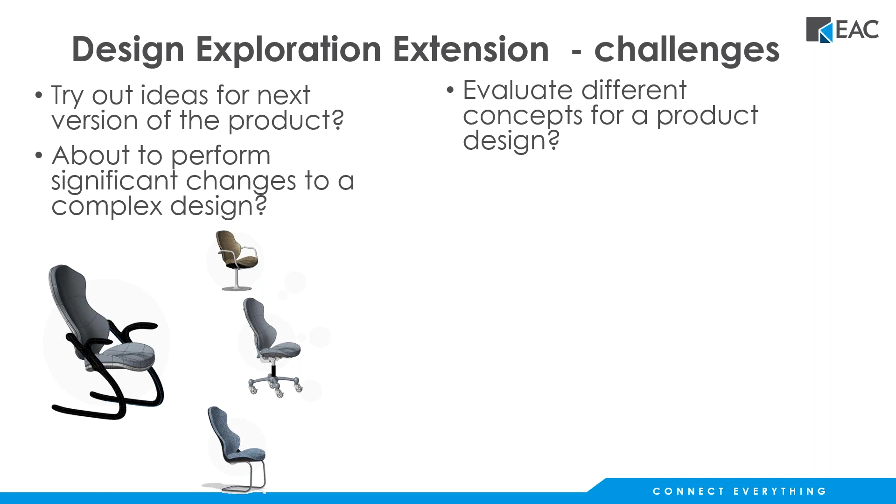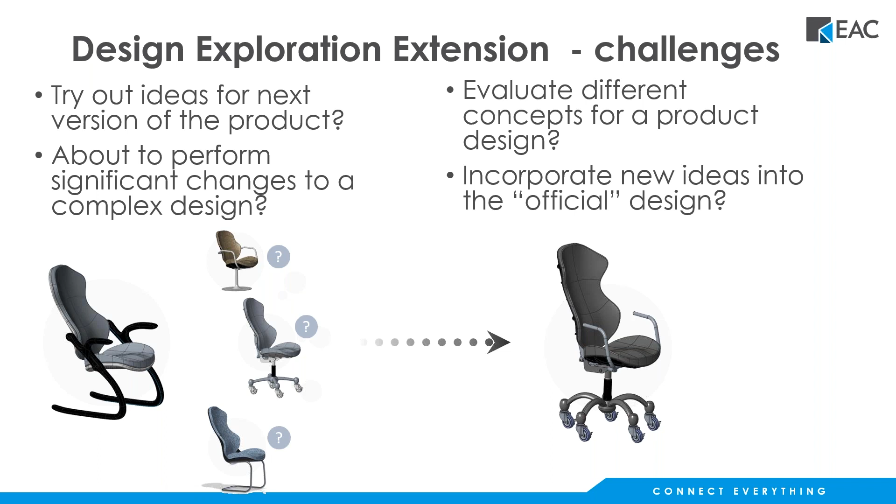You might start off with some of the same features and the same geometry and whatnot, but how do you sort of manage that and iterate and roll forward and take some of the initial thoughts and models into different variations of that? And then how do you actually evaluate those things? And then once you finally roll forward and say, yeah, this is the ultimate design that we want to try and produce, how do you consolidate those different thought processes, those different schemes into the final design?

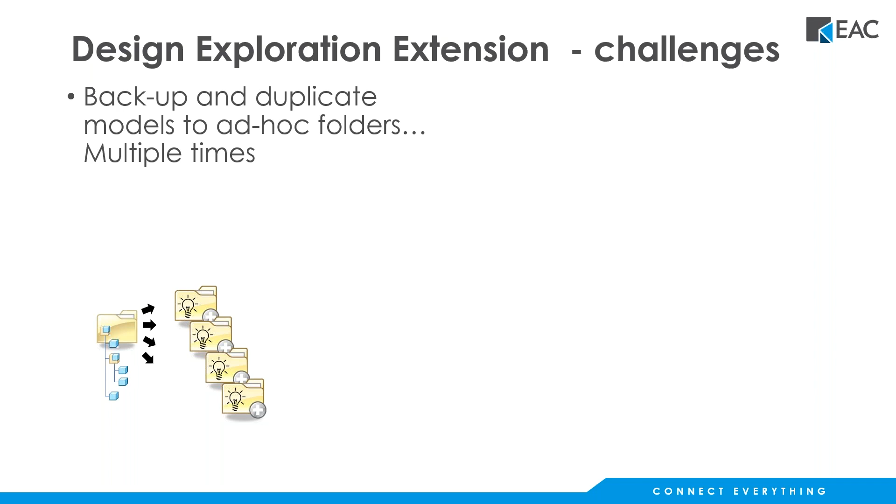Well, a lot of what we've done in the past is what's shown here. We do backup and save a copy, and write that to a new folder, and we have all these different versions of the design. Then we're bouncing back and forth between these different folders, trying to keep track of what we did when, what idea we liked, what worked and what didn't. Whether you're in Windchill or using an old style data management file folder structure, you're bouncing between folders, opening and closing, cleaning things out of session, and pointing to a new folder. And that's if you can remember where everything actually is.

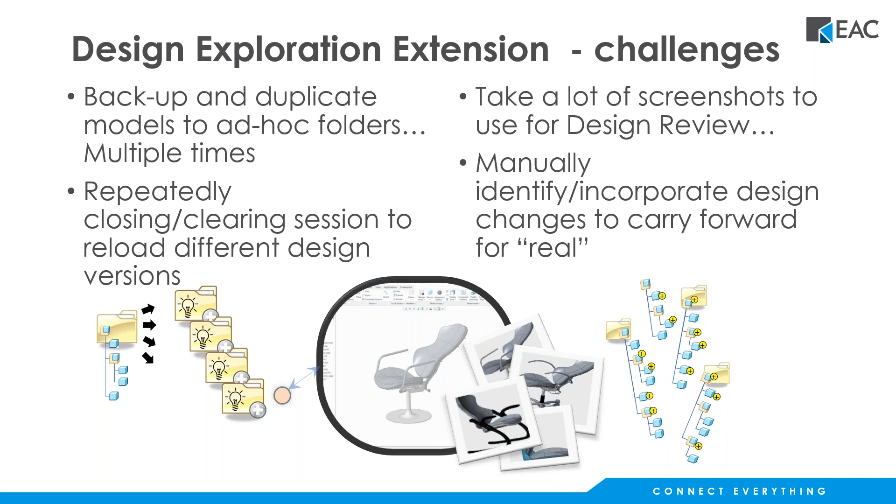So how do you do design reviews of this? You've got lots of different screenshots, or maybe you're in a conference room doing a design review. How do you manage that? How do you work with those different options? And then how do you bring all that forward? You've got all this extra baggage you have to manage and keep track of. If you ever want to go back in time, that's great if you're working on that project right now and can remember what's going on. But if you're like me, I forget what I've done six months ago, or even a couple weeks ago, which folder I wanted, which model I was working on. It gets rather cumbersome to keep track of all these different concepts, versions, and flavors of the model.

Well, that's where design exploration comes in. What you're doing is creating what are called checkpoints in the model, and you can have all of these different iterations, design concepts, and thought processes all stored in one location. That can be done at the part or assembly level, worked interactively or in an integrated fashion, so you have different design variations all in one place.

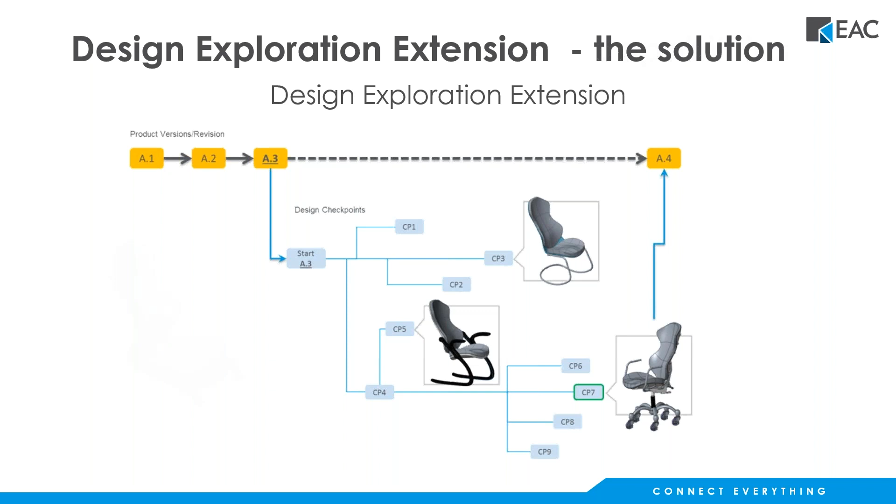Here you can see a layout or roadmap of how that works from an architectural standpoint. We're going to have different product revisions, and say, hey, we're at A.3, we're going to start a new branch with some new design options. The A.3 is probably familiar terminology, but the CP is a checkpoint — a snapshot of that design at that point in time. Then we can step forward and back, toggle between these different checkpoints, and roll forward different options, keeping it all organized in one location. So here's a roadmap of what this does.

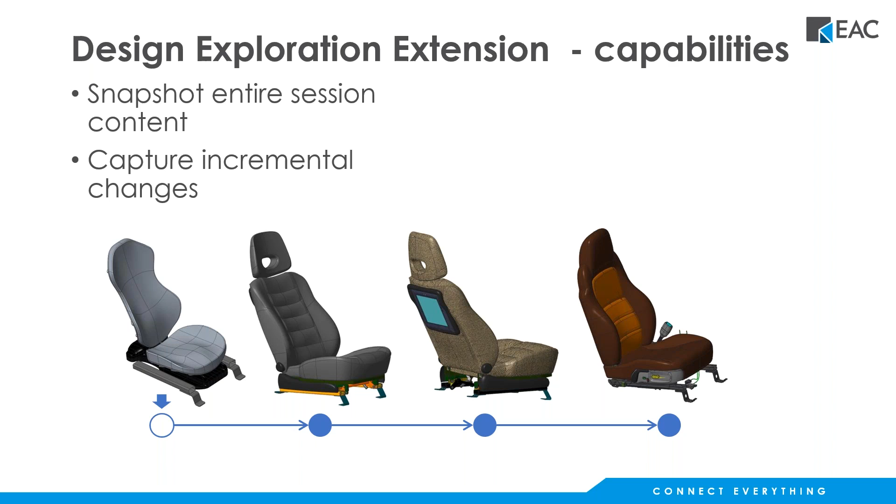I'm just going to build out the slide here and we'll talk about things. So what we do is start the design exploration session, and I'll show you what this looks like both in slides and in the software shortly. We're going to snapshot the entire session content, and then work with incremental changes, either at the part or assembly level, to roll through our design concepts, try out different things, and snap back and forth instantly between these different checkpoints.

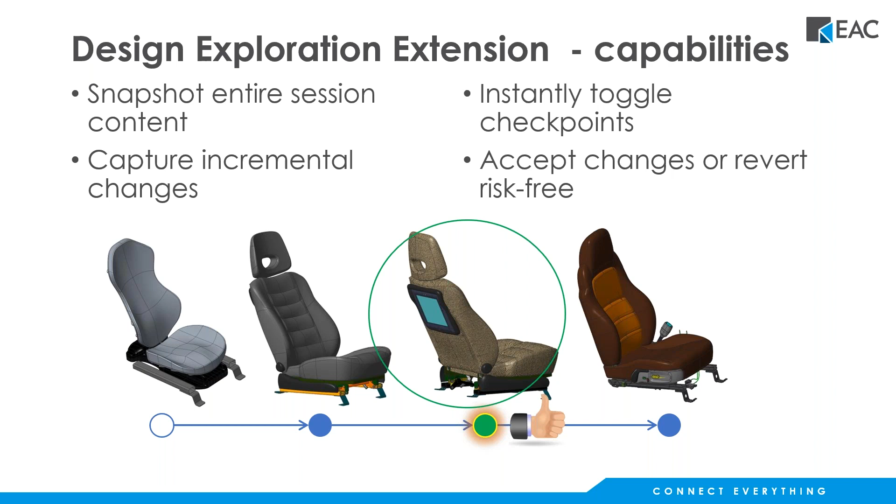So it's not like we have to worry about clearing our objects out of session in Creo, going to a new working directory, and opening up a new assembly or model from there. We can toggle back into the final design we want to keep, and choose whether we want to accept those changes or roll back to a different checkpoint at any time, since it's pretty risk-free and straightforward to do. We'll build out this slide too — we've got different capabilities, we can split off into different branches and try different things.

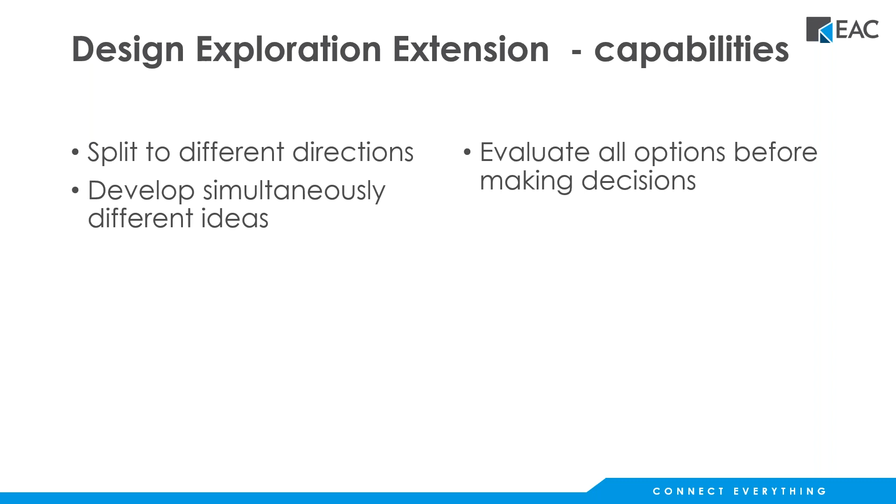You can work on different options simultaneously. Here we'll build out the graphics to show this. We start off with one initial base model or concept, and we can branch off in a lot of different directions, starting from that original design and taking it further. We can toggle back and forth between those different options at any point without losing any prior work, because it's all contained within that assembly.

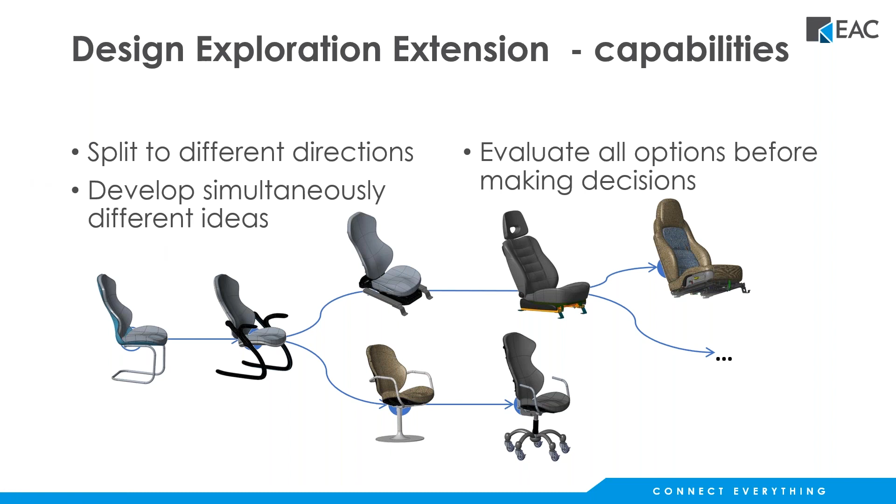So what does this look like in session? If you haven't seen this before, take a look at the Manage Session menu—we'll show you this live in a minute or two. You'll find the option for Design Exploration Session, and you can either start a brand new one or open one up and begin working from a previously created design session.

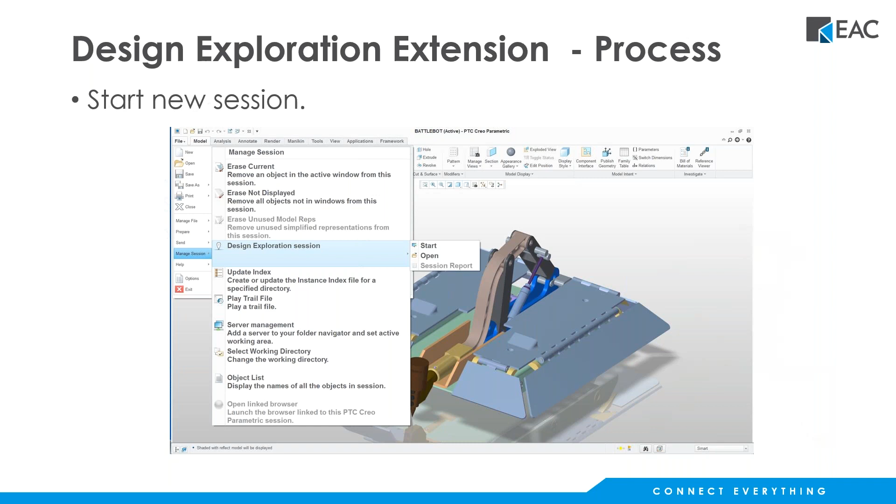So let's go ahead and take a look at that. Here's what it looks like. You'll note that when we open up that session, it opens up what looks like a model tree, parallel to that, but this is all your checkpoints. You've got tools for toggling back and forth between different checkpoints and creating branches and new checkpoints. You can think of this as very much like a snapshot of the process.

So I want to start a new branch of a design or make some changes, and I can go off in a different direction and try different concepts. When you start this new session, it gives you a couple of different checkpoints: the pre-modified checkpoint, which is basically where you start from, and an entry checkpoint. This gives you the opportunity to change that and update the different checkpoints from there. Notice at the bottom, you've got an add checkpoint option right here—so as you make modifications, add or remove features, you can add the checkpoint to capture those changes.

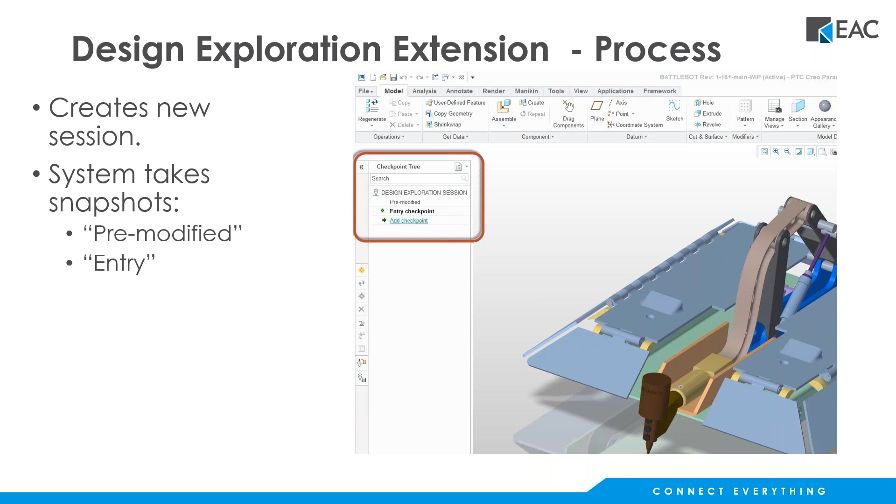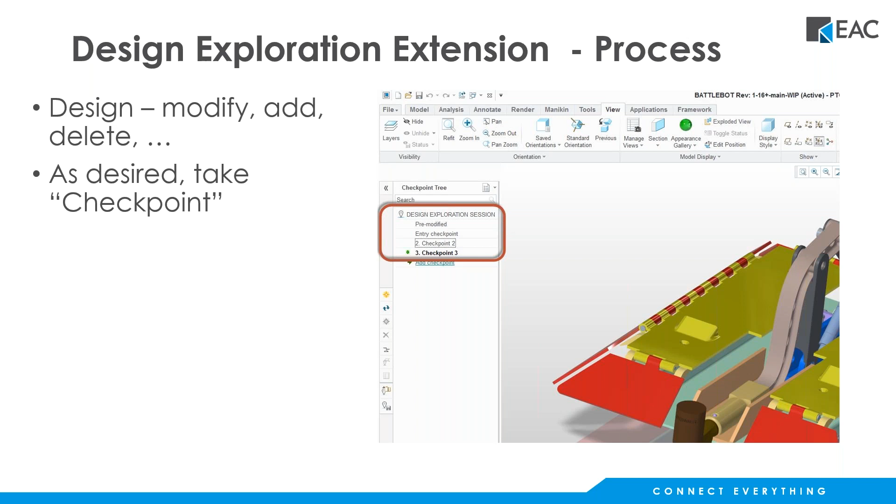And that's exactly what we're showing here in this slide. Go ahead and do your design changes—it doesn't really change how you work inside Creo. It just gives you an opportunity to manage the little snapshots or checkpoints along the way. You'll create features, add parts, pattern things—your normal day-to-day operation of working with Creo—except now you've got this additional capability of creating checkpoints to track your thought process through the design and development.

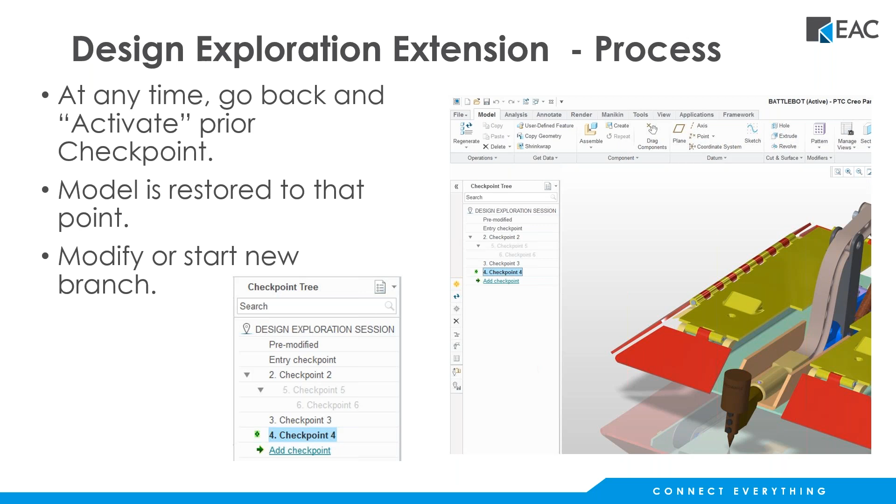If you'd like to go back in time and take a look at a previous checkpoint, no problem—you just select the checkpoint and activate it. It'll snap back to the previous set of configurations, features, and components to take you back to where you were at that point in time. You can roll back and forth between these different checkpoints at will. So it's really straightforward to look at these different design variations.

When you've completed the modifications you want and you want to land on that final option, you can save that design exploration session. There are icons in this little tray in the interface for that. Go ahead and save that session, and that saves it off as a TMU file—just a different file type, and we'll show what that looks like to open up from Creo. It saves all the different checkpoints and everything along the way.

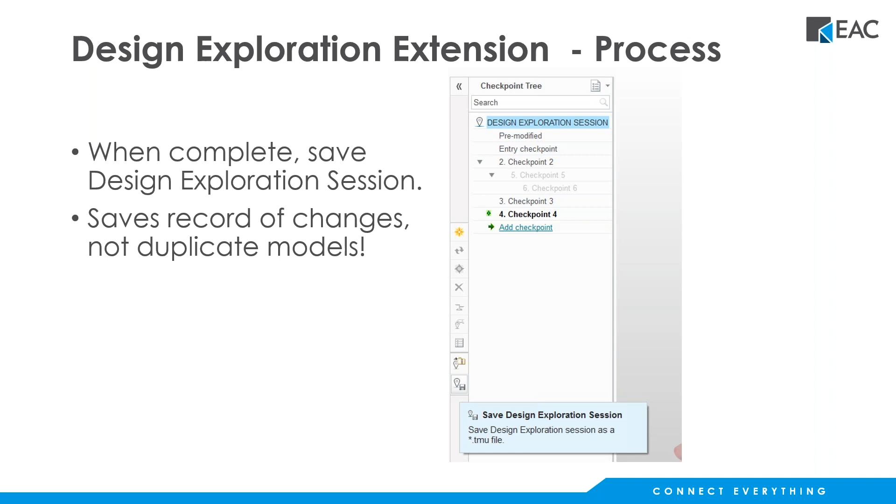So it keeps track of all the different changes. And this is the beautiful part of this: I don't have to write this out into a different folder—all of those changes and modifications are stored inside that part or assembly file. So the next time I want to open that up, I can see all of those different changes and say, let's go back and look at checkpoint number 4 and start from that and do some modifications to it.

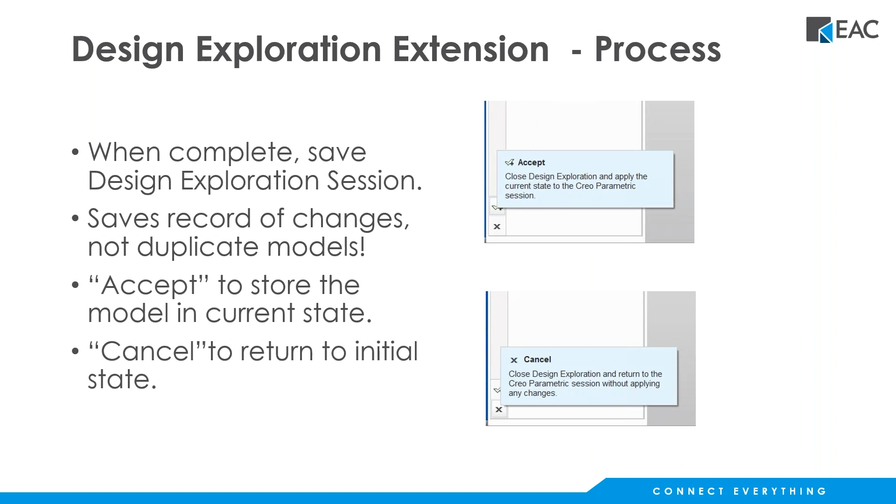If you'd like to, go ahead and cancel that. If you want to abandon those changes, no problem. You can cancel out of that just as easily as saving it. So it's really very easy to work with.

It's very straightforward. So here's the process of opening up a previously created design session. You just go back and open up that TMU file, and it'll show you that tree from there.

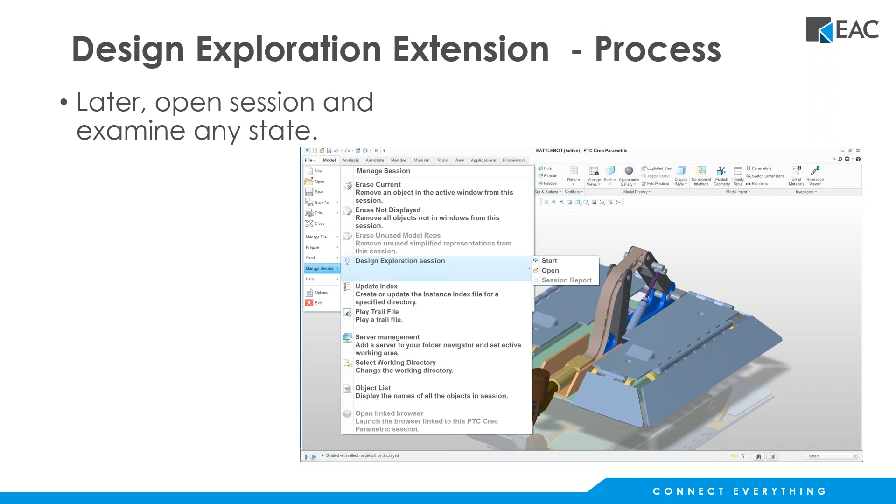The thought process behind this facilitates creativity, because you're allowing much more flexibility with respect to creating the different options, storing them all in one place, and you don't have to worry so much about file management and folders and organizational things. You're just focusing on the design process instead of being a librarian or some sort of data manager.

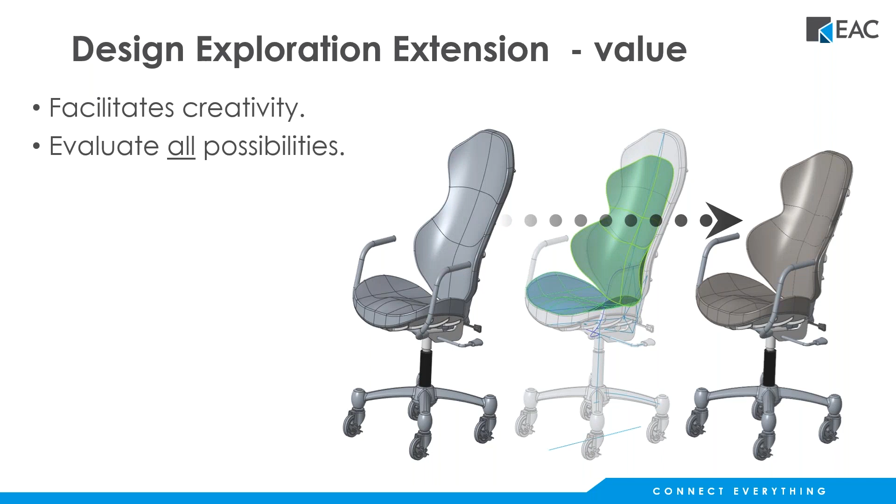And evaluating all the possibilities, right? So all of these might be different design variations that you might want to put together, and they all sort of spin off or start from one concept, and you can go a lot of different directions from that and save all of that in one location without having to have a myriad of different folders.

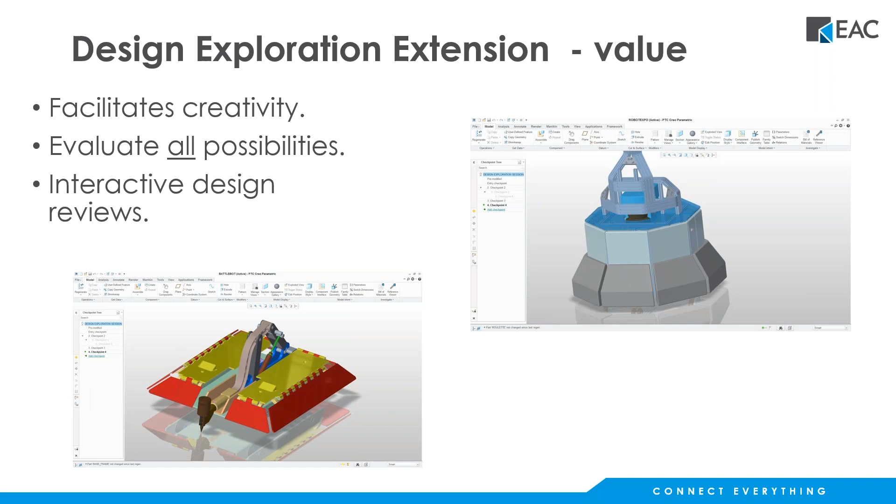Great functionality for design reviews, right? So again, you can just toggle through these different options without having to worry about managing folders and things. It's just a really great tool for looking at all the options in one easily accessed place.

So we're going to show a couple of different things today. We're going to show Creo Simulation Live, which I have on the screen here, in conjunction with the design exploration. It's really an awesome set of tools for design and simulation. We've done a previous presentation on this fairly recently, so I'm not going to go through this in a lot of detail, but just to give you a real quick overview of Creo Simulation Live.

Why do I care about Creo Simulation Live? Well, it's a tool that allows me to do basically instantaneous simulation, whether that's structural, vibrational, thermal, or now in Creo 7 flow type analyses, very quickly and easily. I don't have to be a specialist in FEA analysis or anything like that. I don't have to make modifications to my model. I don't have to defeature and strip down the model. I can do my simulations on the models as I'm creating them.

So I get basically real-time feedback on the design changes and choices that I make, especially in conjunction with this design exploration. So what is it? It's functionality that's a result of the partnership between PTC and ANSYS. It's the integration of some of the ANSYS capabilities directly inside Creo Parametric. And it's not intended necessarily to replace Creo Simulate, but rather work in conjunction with it.

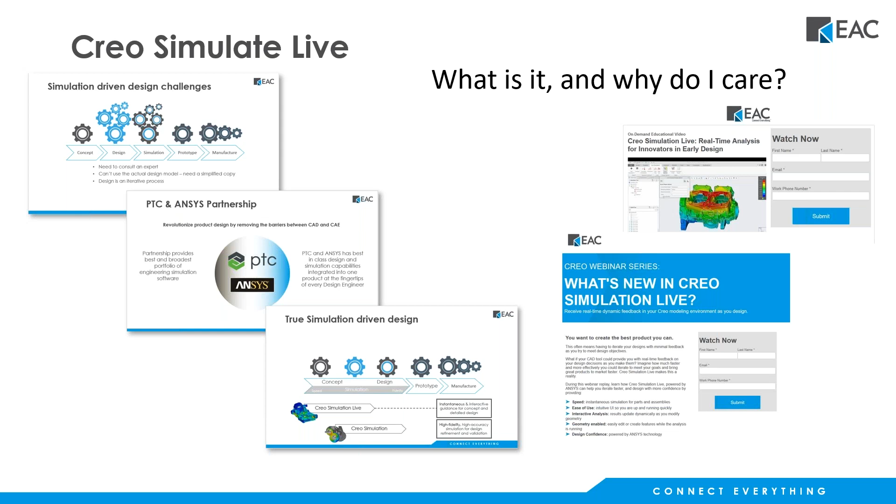You can think of this as an early on set of tools for design validation and simulation. If you want to get into more detailed types of simulations like optimizations, sensitivity studies, and those types of things, then Creo Simulate makes more sense for that. But if you're just doing design validations and you want accurate results for the different types of analysis we mentioned—structure, vibrational, thermal, or flow analysis—Creo Simulation Live is a great tool for that because it gives me real-time feedback as I'm making the design changes.

One slide that just kind of talks about the summary of capabilities inside Creo Simulation Live. I've spoken to most of these things here, but just so we have a slide that encapsulates those items on the screen.

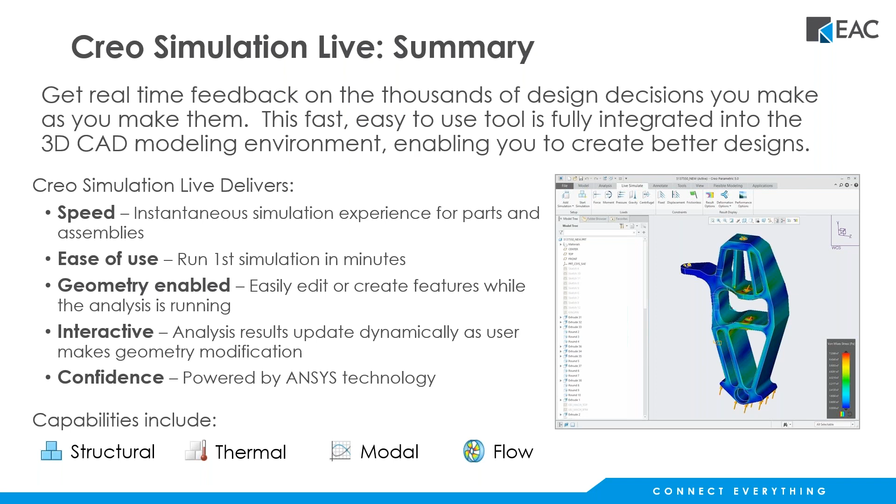So with that, I'm going to jump into the demo, and we'll give you an idea about what that looks like. We'll go ahead and get rid of my meeting announcements there. So Creo 7, I'm ready to do a file open, and in this case, I've got a TMU file. So this is one of those design exploration sessions. The only thing I've done here is basically selected that, so I'm toggling into that file type. I've already gotten one of those started, and I'm just going to go ahead and grab this design session here.

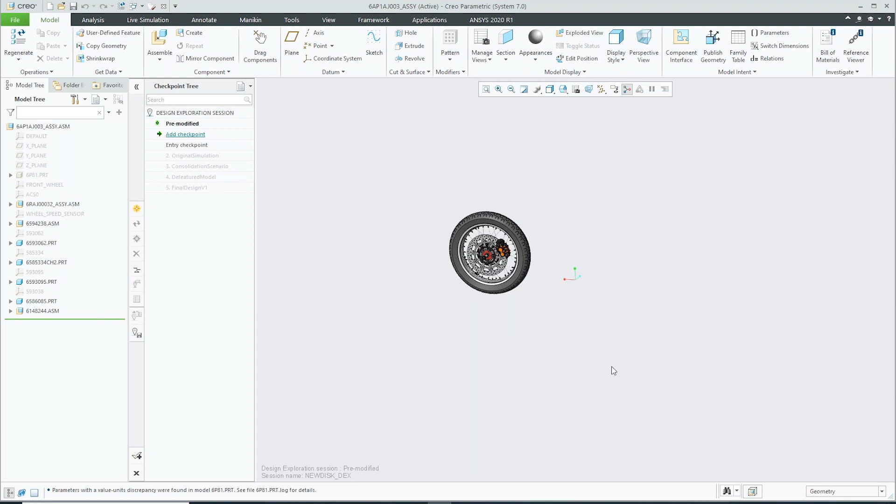And let's go ahead and show you what this looks like. So this is just a summary of the models and things that it's going to retrieve in session. This will take a second, and we'll pull this up. Let's get a zoomed in view of the wheel and see what we're looking at here.

So motorcycle wheel, we're going to take a look at some design variations of the brake disc here for this assembly. First thing to bring to your attention, you'll notice you've got this design exploration checkpoint tree that opens up parallel to your model tree. So this is your roadmap for all of the different design variations and things that you've set up in your design exploration session.

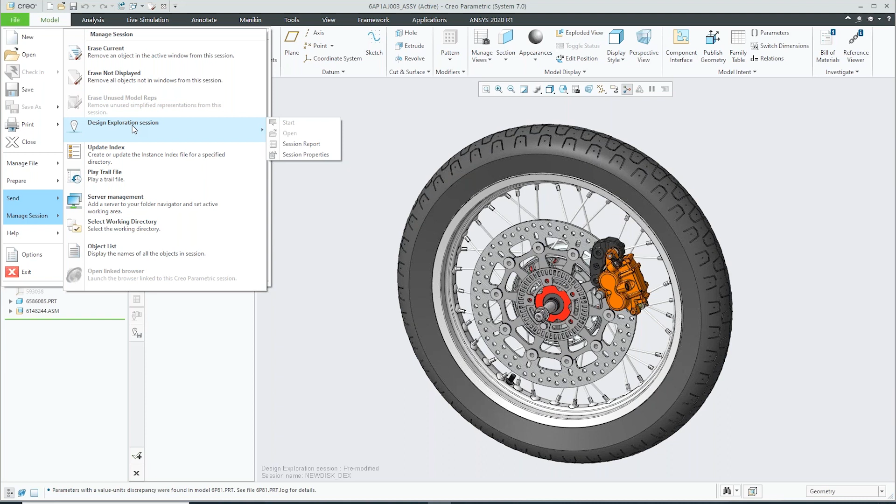Just to show you the entry point for that, if you haven't created one before, you'll go to Manage Session, and in your design exploration session, this is where you would find that functionality. If you hadn't created one, this is where you create a new session. Since we've already got one open, we don't have any options to pick here, but I just thought I'd show you what it is in the model tree structure, or in the file structure.

Okay, so this is the model that we're going to look at, and we're going to focus specifically on this disc wheel for the brakes. Let's go ahead and take a look at that right here. We're going to focus in specifically on this assembly, and let's zoom in and get a feel for what this thing is all about.

So you notice that as I toggle between that upper level assembly and my next level subassembly, my design exploration tree is still there, right? So it functions across parts and assemblies to help me really focus on what I'm doing and allow me to create different branches.

So for example, if we wanted to do a structural simulation on this right now, let's take a look at where we are. We'll go take a look at our Creo Simulation Live, and go ahead and take a look at these different checkpoints. So I'm here and I want to say, hey, let's look at our original simulation. Now let's go activate that.

And so now what that's done is that particular step, that checkpoint, has added in my boundary conditions. So we already have the geometry and material properties. And now what we've done is we're going to clamp that disc brake here in the area that we've got identified and apply a load to that. And we can go ahead and run our simulation on that.

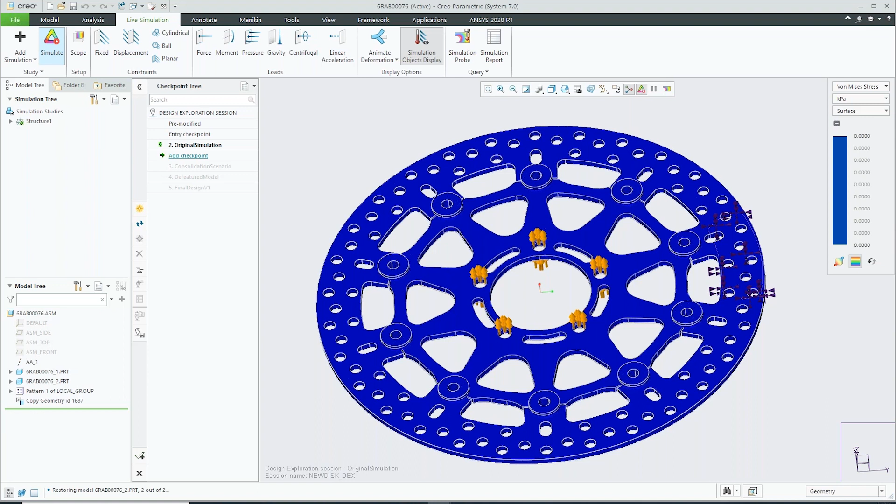So go ahead and fire that up. And pretty much instantaneously, we're starting to get feedback as far as the stress that's in that model based on that loading scenario. So let's go ahead and check the units here. We'll change that to a little bit more standard kind of units. So in this case, just keep in mind this number 157 megapascals. That's our maximum stress value.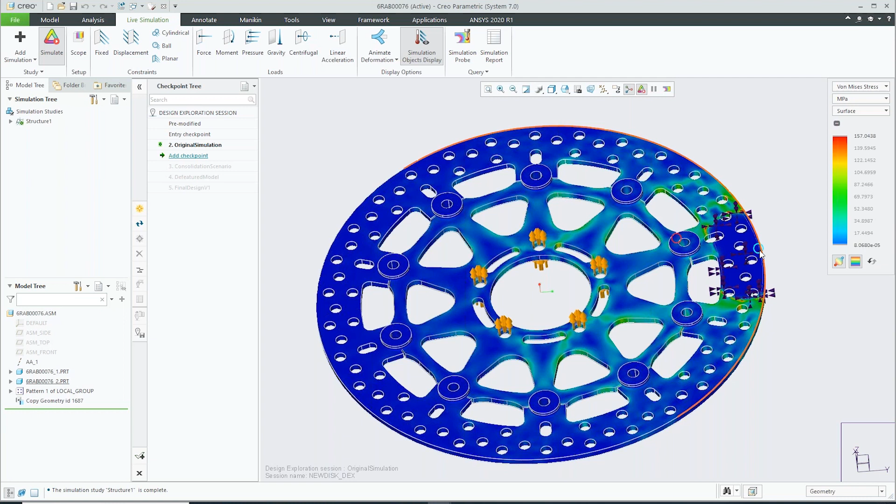And if we click here, we've got the option to highlight the maximum and minimum values for that. So as you'd expect, in one of these areas here, we've got the stress concentration right there. That's our highest value, at about 157 megapascals.

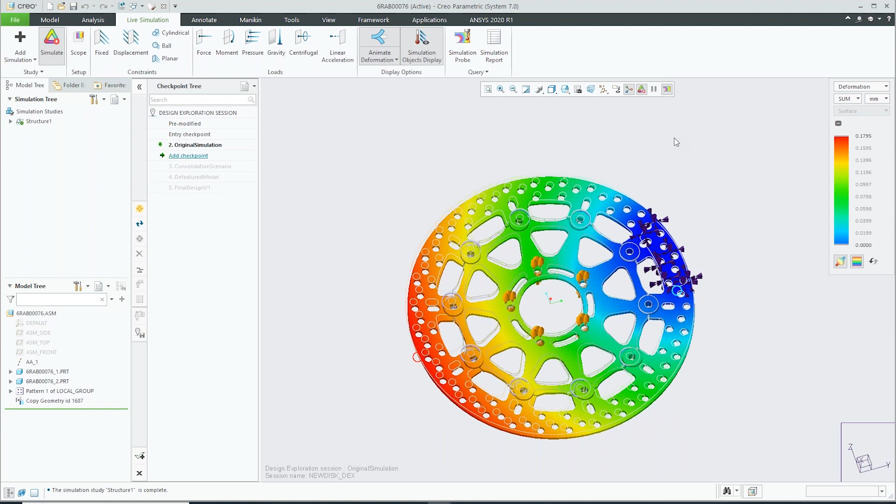If we want to take a look at the deformation for that, we can see that and animate it, to give an idea of how that model is actually going to behave based on that loading condition. So again, the deflection here is about 0.18 millimeters. Keep those numbers in mind, because what we're going to do here is run a couple of different simulations and try to minimize that deflection and reduce those stress values.

So taking a look at another different design variation. Let's go ahead and turn off the simulation for right now, and we'll go to a different design checkpoint here.

Maybe we want to look at consolidating this. Right now we have an assembly, but maybe we want to try a different option, so we'll take a look at this scenario. We're going to activate this, and now what we've got is an individual part with some patterns of different items here.

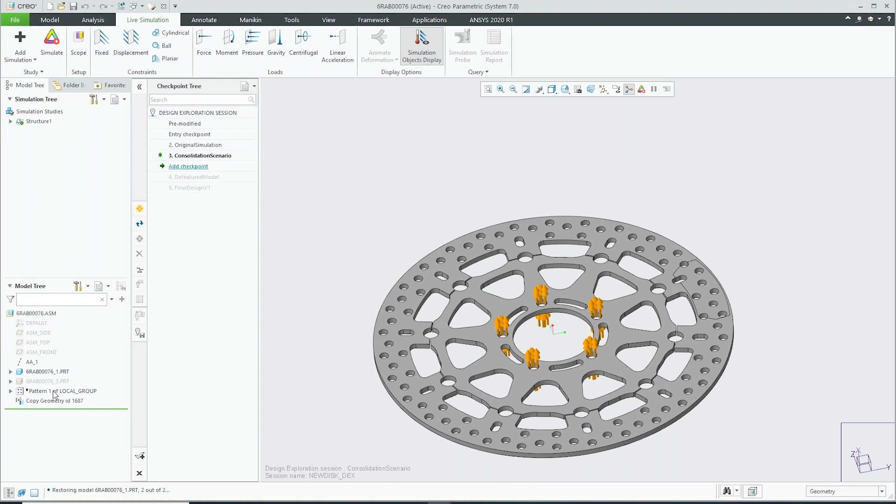Let's say, for example, we want to focus in on one specific part and consolidate those instead of having two different components that are bolted together. We'll see what happens if we can consolidate that into one single component.

So again, just toggling into a different checkpoint in my design exploration session. We just toggled into a different version of that. We go back to our live simulation, and we'll go ahead and run our simulation, taking a couple seconds here to get some feedback on the stress and deflection of the model.

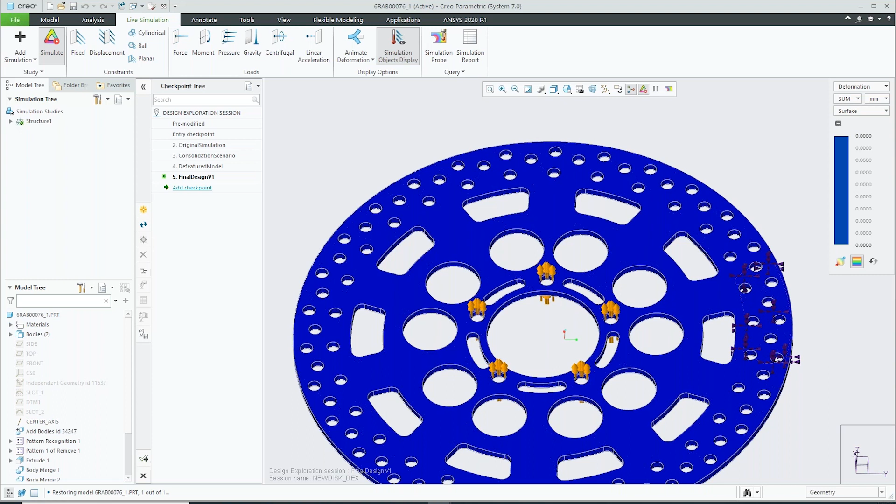So in this case, our deflection's at about 0.15, and if we take a look at the stress values, let's change that back to megapascals. In this case, our deflection is down, but our stress is actually up. So the design change we made here is not necessarily helping us because we're going the wrong way, and we've actually got a higher value of stress.

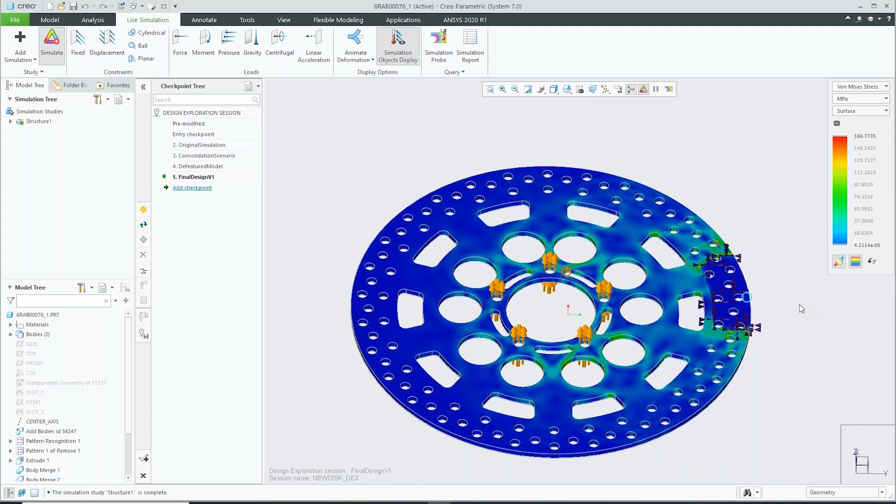If we go back and look at the maximum and minimum values for that, now we've got a maximum stress location here. You can see that that's a little bit higher than the 157, 158 that we had previously. So our design change that we're making here is taking us in the wrong direction.

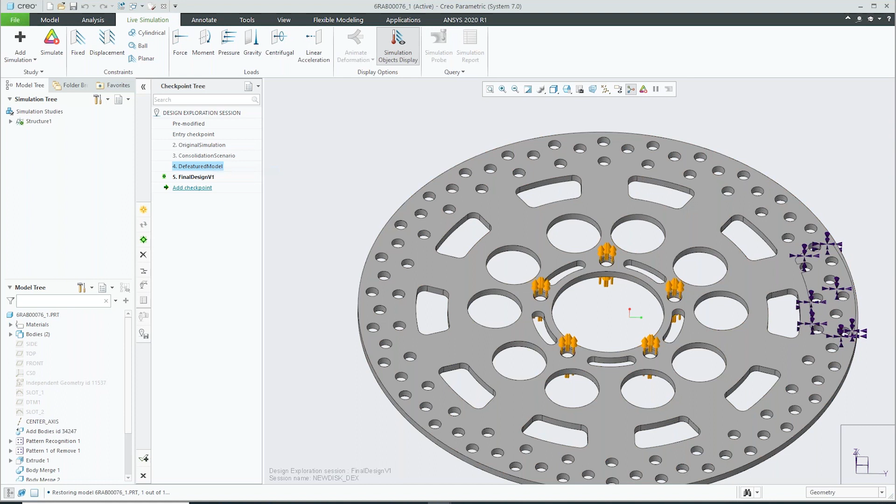So let's see if we can go back and make some additional changes or try something different to give us a different result. I'm going to go back to a different state here in the model. So the thought process is, hey, maybe if I change the shape of that cutout, I can get some different results. So how might we do that?

So I've gone back to a starting point for that, and I've got a sketch here that we can maybe take a look at, and let's see what happens if we can make some geometry here that might change that. This is also going to give you an opportunity to talk about body functionality now in Creo 7.

So what we're going to do here, instead of making a cut, I'm going to go back and create a body and show you some of the capabilities now available in Creo 7. I'm just going to go ahead and create that body, and have it go to the top. We're sketching on a mid-plane there, and we're going to have the top of that body line up with the top surface of our brake disc. So go ahead and create that.

And then if we go back to the model, we're toggling out of the simulate live, and we'll go back here and show you now what we have as far as the body functionality. So we have three different bodies.

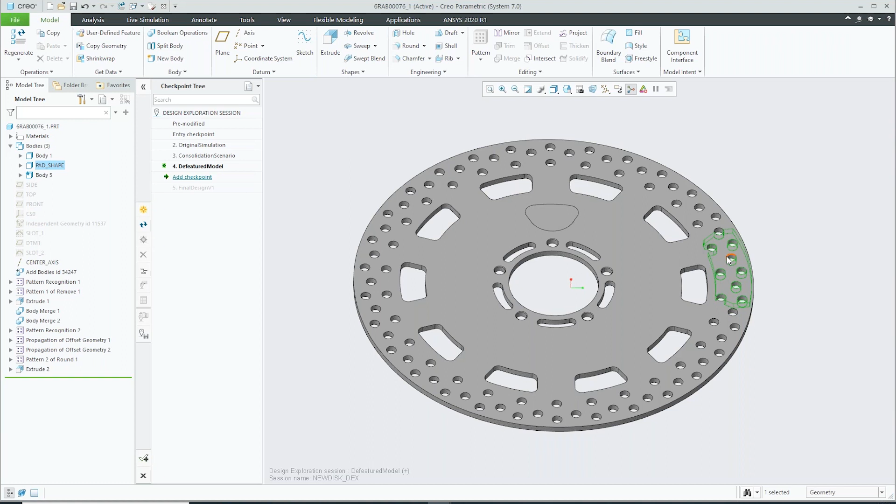We have the basic disc shape, we have a shape here where the brake pad is actually attaching, and we've got the body that we just created. So let's go ahead and hide out that top level body and show you what we're working on.

And just to highlight things a little bit, let's go change the color of that so we can stay focused on what that body actually is. Okay, so this is the little bit that we just created.

And if we zoom in on this a little bit, what I'm going to do is create a rounded edge on that, and then we're going to ultimately subtract that out from the shape of the disc. So let's go ahead and show you how the body functionality works. I'm just going to create a rounded shape there, and to do that, I'm just going to grab this edge.

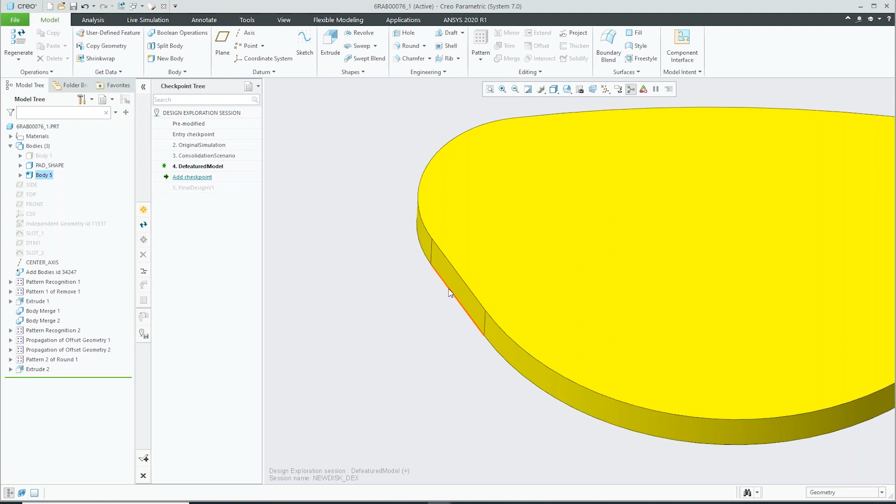If you've not worked with intent features before, they're pretty cool. They've been around for quite a while, but not everybody knows about them. So what this intent edge does is it walks around and grabs that entire edge all the way along there, and that becomes the trajectory for the sweep that I'm going to create. Okay, so let's go back in and zoom in on this just a little bit.

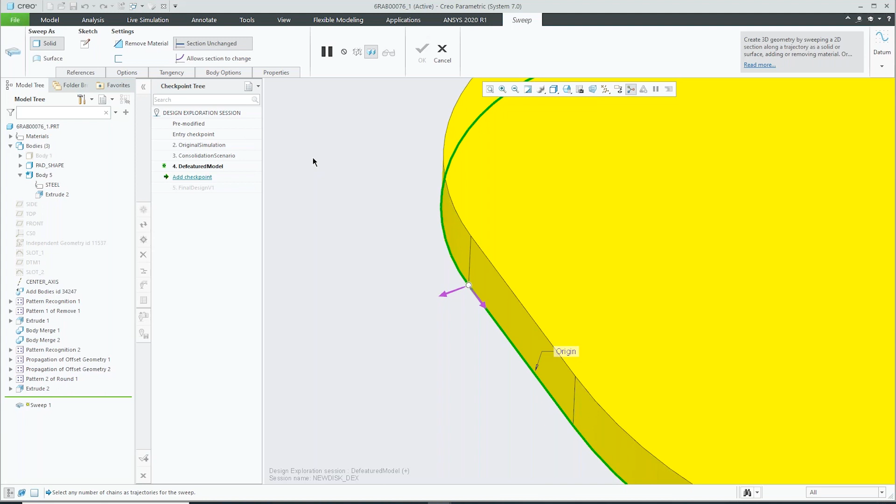Let's go create a sketch that's actually a circle, and we'll make a little round feature here. Then maybe I want to create a little straight edge that goes from here, and we'll have that be tangent there. Then we'll clean up some of the other pieces I don't want, trim away what I don't need, and change this to a bit larger radius so you can see it. That's the shape I'm going to cut out, and that looks good.

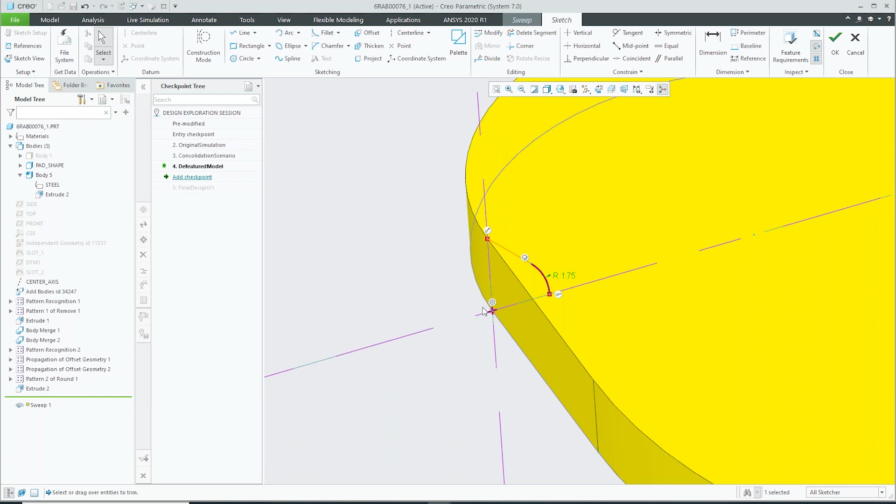We're going to remove that material, so we're going to cut that out. Okay, so that's kind of what we created. Let me go back here to a view of that, which might be a little easier to see. All right, so that's the shape we've cut out of that.

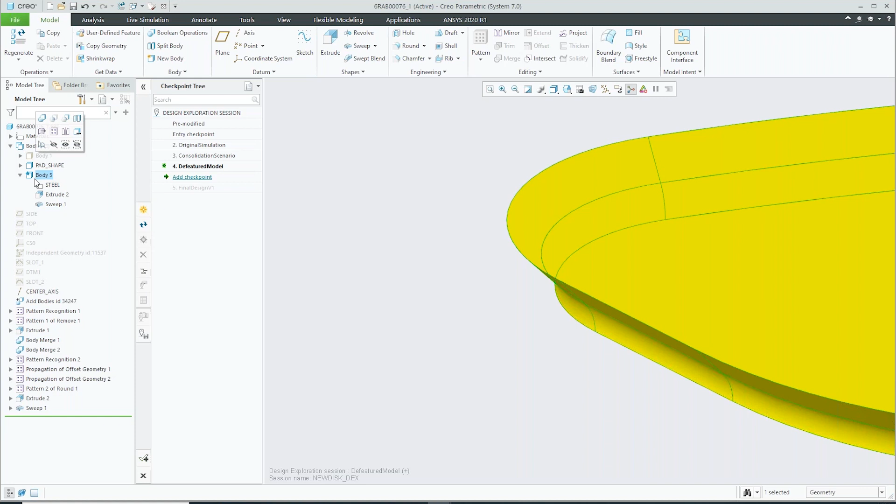Now we're going to go back to this body. Remember that's on the mid plane of the disc, and I want to mirror that about that lower plane. So we'll go ahead and pick that. I basically mirrored that, and now what I need to do is fuse those two bodies together so they behave as one unit.

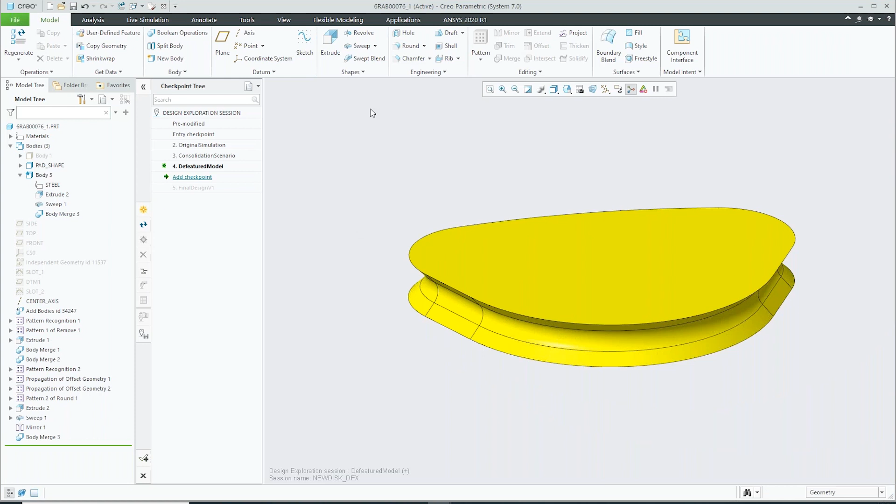So I'm just going to go here to my Boolean operations. I'm going to pick the two bodies and merge them together. Nothing fancy there, it's just basically making that be one unit. Then we'll go back and turn on this top level so we can see where that fits in the overall scope of the wheel or the brake that we're making.

So now we want to pattern that out. We'll go ahead and pick on that body and say let's pattern that out. I want to make this an axial type pattern, and I want to pick this center axis as the thing I want to pattern that about. Now I'll say I'd like to have a total number of 8 of those patterns all the way around, and I want them evenly spaced.

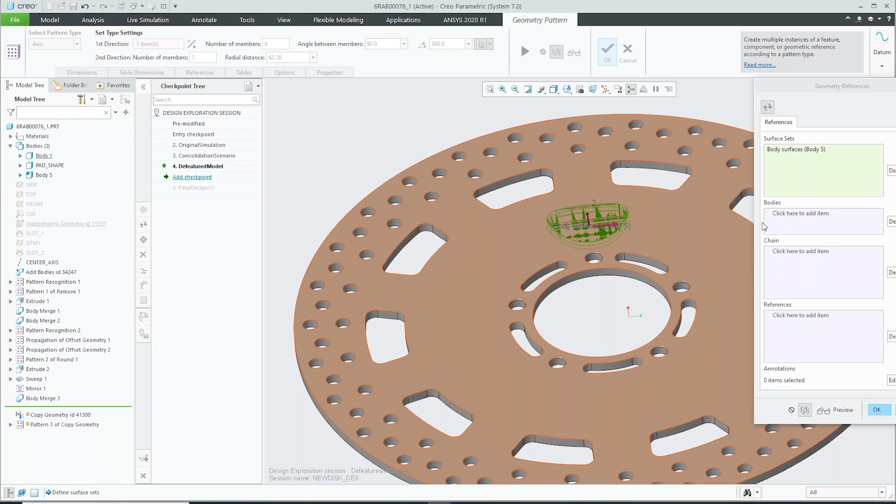The next thing I'm going to do is pick on my references. I'm actually patterning out not necessarily the body, right? I want to get rid of that, but I actually want to bring in the surfaces because I ultimately want to subtract that out. So I'll go pick on the surfaces there. Then the last thing I want to do is set that up to trim that out, to get set up for it. So we'll go ahead and preview that and end up with our geometry.

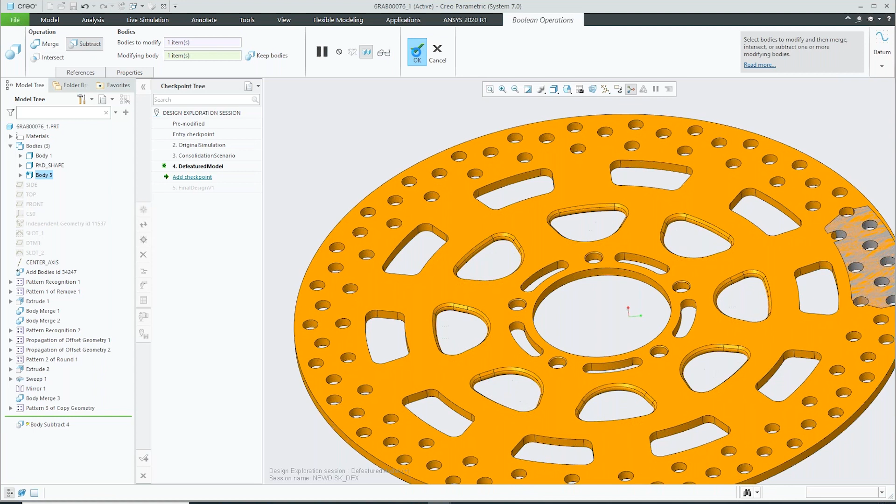Again, the last step is just to create a Boolean operation to subtract out that piece of information, those little yellow wedge-shaped parts, and we'll end up with geometry that looks like that. So again, a little bit different methodology in working with bodies, but once you start working with it, you'll find it's a very easy and powerful way to go back and create geometry.

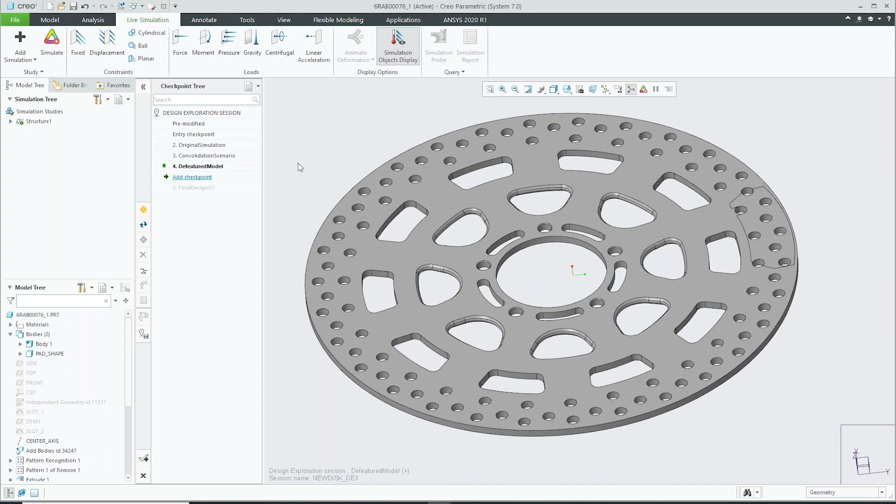Okay, so now we've got a model that's set up, ready to go. Let's take a look at some simulation of that. In this case, we didn't necessarily have any boundary conditions assigned because this was sort of a de-featured model, so we just need to go back in, and I'll show you now how to put in the boundary conditions on our model for simulation.

So what I'll do now is pick on the two surfaces that I want to actually constrain, right? So that's the area I'm grabbing on with the disc caliper, so we've assigned that. Then the next thing we'll do is create a moment, right? So that's our load we're going to apply. In this case, I'm just going to go ahead and get set up here.

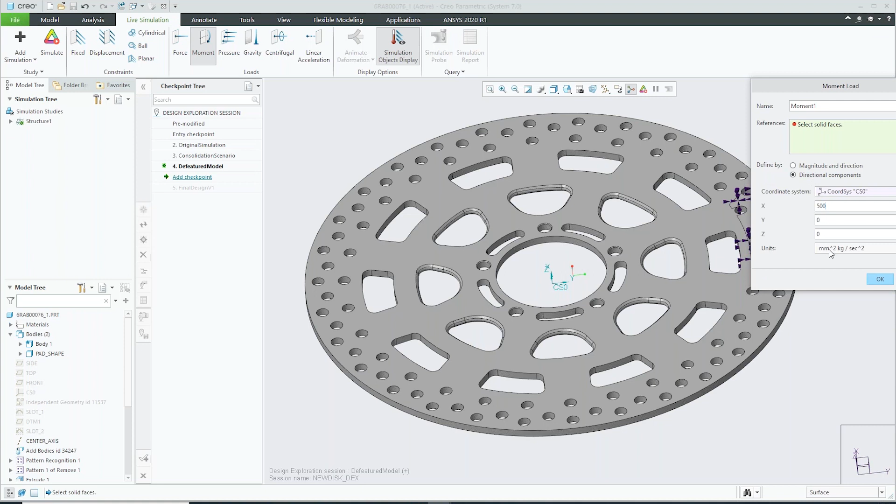We'll put in 500 Newton meters, and we're going to pick on the geometry we want to apply that to. So I'll just pick on the bolt hole surfaces, select that, and apply the load to that location.

That's the same loading condition we had before, and I've shown you how to set that up. So again, running the simulation, we'll show you the results here. Just a minute, we'll wait for that to update.

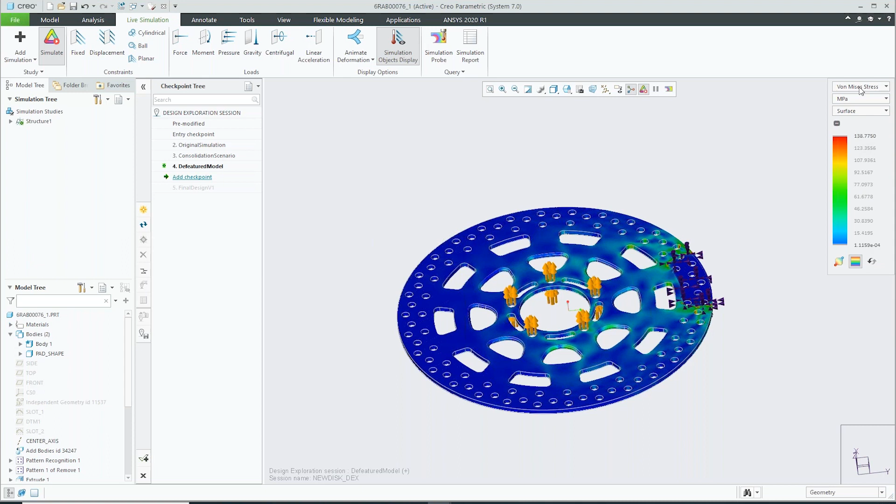So again, now we're significantly less. We're at about 138 megapascals, where we were at 157 to 163 megapascals before. And if you take a look at our displacement for that, you can see we're actually quite a bit less. The big thing is the stress is actually lower.

So within the span of about 15 minutes, we've looked at creating new geometry in 3 different simulations, all pretty quickly and easily. So this, as I said at the onset, is a really good set of tools for working inside Creo to help me look at several different design variations and run simulations, giving me much better insight into the performance of my model without having to track down somebody in the simulation or analysis group, get on their schedule, and have them run a couple different scenarios for me.

So that's what I had for you today from the presentation standpoint, actually showing the software, how Design Exploration and Creo Simulation Live can work together to really speed up and enhance your product development process.